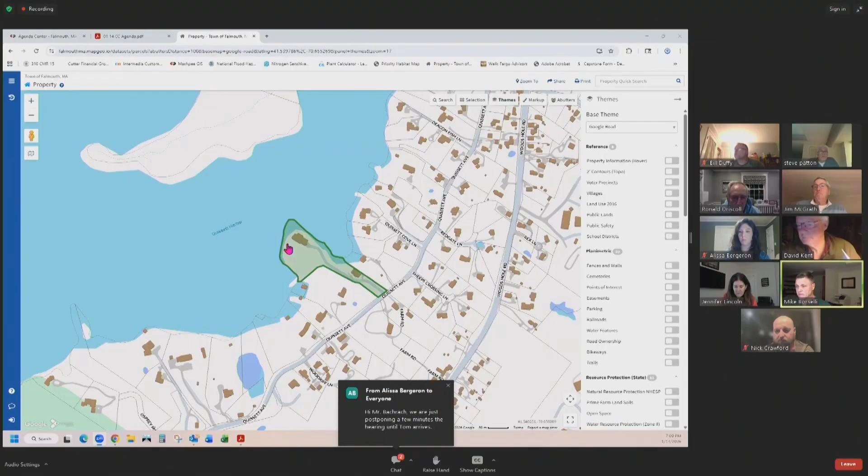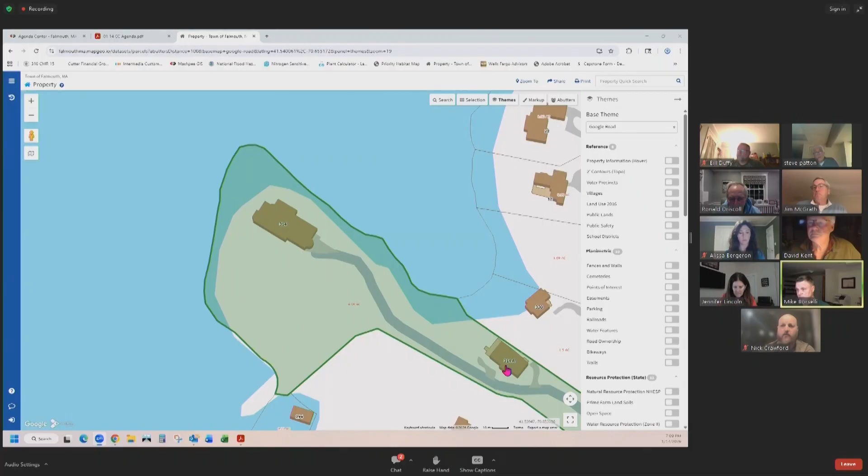I'm going to share my screen very briefly. I'm sharing with you the town GIS map, highlighted in green the property in question. It is property with frontage on Quissett Avenue and Quissett Harbor. There's a large residence currently under renovation in this location, and another carriage house further to the east. It has frontage on Quissett Avenue. It is surrounded by a coastal bank, portions of which are armored.

There's an existing dock. This commission issued an order of conditions in the recent past to reconstruct that dock. This commission also issued an order of conditions to do some significant property improvements, including a reconfiguration of the driveway, construction of a pool and a pool cabana. You've also issued a couple of RDAs for minor activities on the main house and some activities associated with the carriage house. Now we're here for permission to do some other improvements on the property.

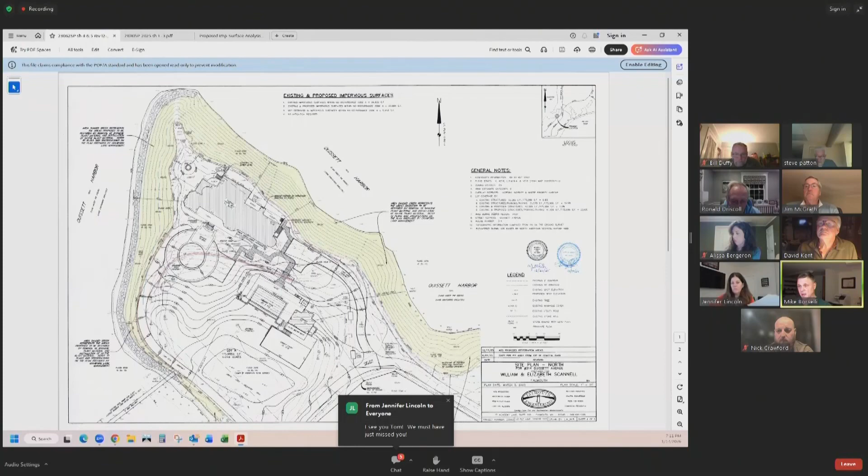The coastal bank that surrounds the entirety of the property on the Quissett Ave frontage is full of invasive plant material, and the applicant is hoping that you can approve an extensive invasive management program designed by Crawford Land Management. We provided for the file the overall master site plan, on which I show highlighted in green the areas of invasives, basically from the top of the coastal bank seaward to the toe of the bank. The methodology, details, protocols, and all details associated with the work are outlined on the technical plan prepared by Crawford Land Management. There's not really much more for me to say. The area of expertise is Nick's. I'm going to stop sharing, but I'm available for questions, and I'll turn it over to Nick.

Thanks, Mike. Good evening, everyone. Nick Crawford from Crawford Land Management. So what we have here is a fairly straightforward invasive species management project. The total area proposed for restoration is approximately 42,000 square feet. Of this, approximately 33,600 square feet is highly invaded with invasive species, including the usual suspects: honeysuckle, border privet, oriental bittersweet, porcelainberry, multiflora rose, etc. There's a few pockets of native vegetation on the coastal bank, and that's what makes up the difference between the 42,000 and the 33,600 square feet.

As far as canopy trees on site, there are a mix of native canopy trees including red maple, black oak, eastern red cedar, American holly, and black tupelo.

There's currently, well, it says 11 invasive trees on site that we would be flush cutting and treating. But I'd like to clarify it's actually 10. One of the 11 invasive trees was actually just a large privet we noticed when we went out to flag the vegetation.

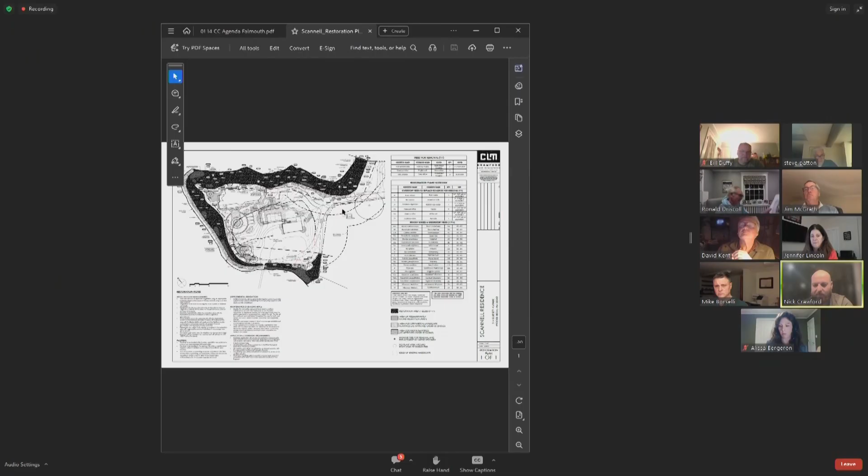Can you see anything? We can see the agenda, Nick. Okay, perfect. Let me zoom out a little bit so you can get the total extent. This is the entire site.

All the areas proposed for restoration are in gray. The areas that have a healthy or decent native plant community currently are in darker gray. When we propose to restore this, 100% of the native species would remain. So out of that 42,000 square feet, approximately 33,000 of it is proposed for invasive species management.

There are minor invasives to remove from the areas that are exhibiting native plant communities currently. Hold on, sorry, I just got a lot going on my screen.

In a nutshell, the way the work would be completed is all from the top of the coastal bank. We would use low impact footprint tracked equipment from the top of the bank to aid in bringing material up the bank after it's been cut and treated, and to get it to a brush container on site. All the work on the bank itself would be completed by hand, and all the herbicide application would be completed by licensed applicators.

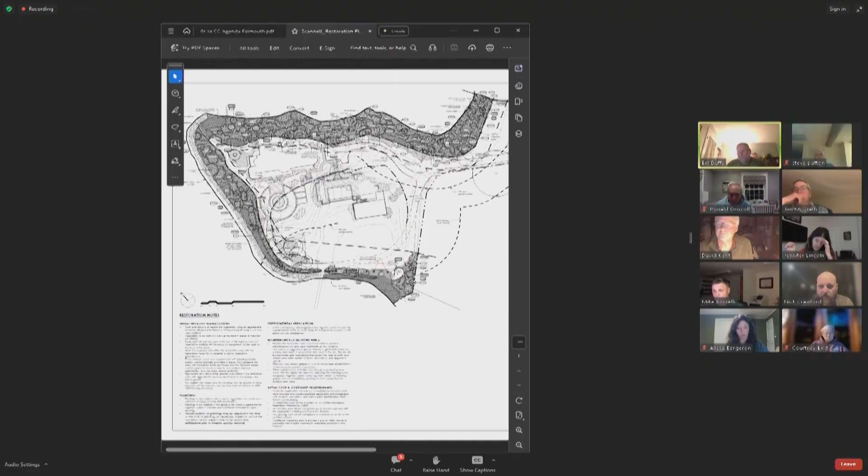Thank you, Nick, for answering our questions. I think the runoff question was about when times of rain are forecasted, because that slope is so steep, but you explained that, so I appreciate it. We were wondering how you were going to get a brush mower on that northeast bank, which is quite steep. So by hand with a weed whacker, that's fine.

You pretty much answered all of our questions and comments. Mr. Chairman, we are going to need to continue this for natural heritage comments. Just to let the board know, we have to place the hearing for your project within 21 days, and in the state's infinite wisdom, natural heritage gets 30 days to comment. So a lot of times we don't get natural heritage comments because they have another week or so to fulfill that. Unfortunately, sometimes we do need to just continue these for natural heritage comments.

Thank you. Alyssa, do you have anything to add? Not at this time, thank you. I'll open it up to commission comments and questions.

Dave: I don't really have any questions except, Nick, can you explain what a flush cut is? Yeah, it's just cutting flush with grade. So it would be approximately at grade or about an inch above grade.

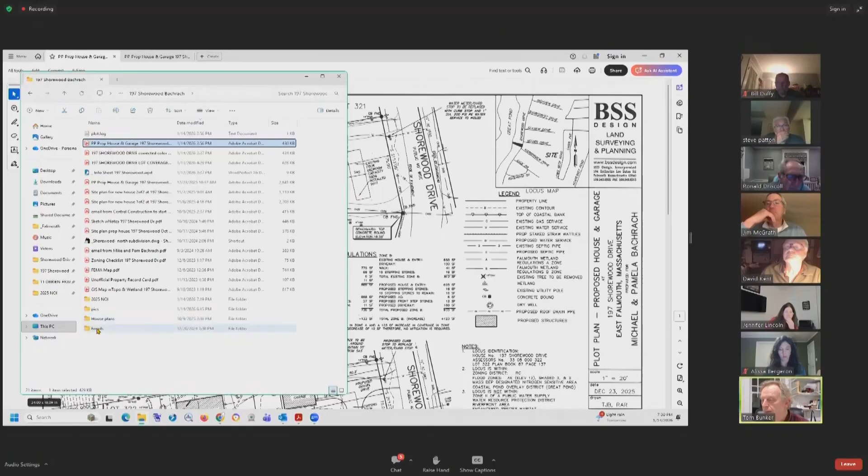There are a couple sort of errors of omission where we had done some work back here in 2015 and didn't adequately check our plan before we filed it. One being, I'll note in the upper left by where it says lot 322, we show a 12-inch pine that's no longer there, and it's noted on the staff report that it said the tree was removed in 2018, but if I may, I'll show a picture. It actually blew down, that was in March of 2018, that 12-inch pine tree. They had it cleared up by a contractor, but it clearly blew down before anything else was done to it. So it was not removed by the homeowners.

And there are a couple other things that are incorrect on the existing conditions, but I'll go through anyway. So we have this existing house, which was built about 1954, on Shorewood Drive. And you see on the locus map, this is the Shorewood Drive that's up north, not far below Route 28, right on Great Pond, not far below where the Coonamessett River comes into it. The house next door here on the south, the Bachrachs also own and live in, and that house was built not too long ago. So what they're proposing to do, well of course, involves the resource areas.

We have the Great Pond land under a salt pond, some fringe of salt marsh here, coastal bank, the flood zone comes right up just about to the top of the coastal bank, which exceeds a 4-to-1 slope, but the bank itself does not go much higher than the flood zone, which is elevation 12, I think.

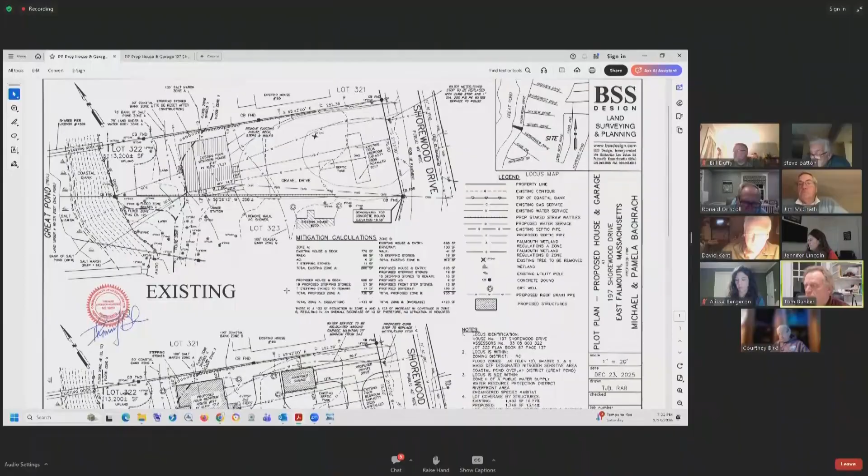In the staff report, you'll notice this proposed garage, which is outside, not in a flood zone or in a buffer zone. So I have this existing house here.

And the proposed house, as you can see, looks basically the same. It is 2 feet further landward and was squared off a little bit, where this house is 7.6 feet to the property line. By moving it back and rotating it parallel to the property line, I now have 8 feet from the house to the property line.

Where the house's closest point is 51 feet to the deck, or the steps rather, and 76 feet from the salt marsh elevation. In this case, it was 51 feet and is now 53 feet. And 76 feet from the salt marsh is now 79 feet. These are rounded off to the nearest foot, which is why one increased by 2 feet and the other by 3 feet, but it's still an increase.

I do think that 8 feet, I know you have your 10 feet requirement, but 8 feet with no native vegetation around that could be harmed, I think 8 feet is adequate for putting the house in. It's level, there's no native vegetation, and no problem getting equipment around on this side.

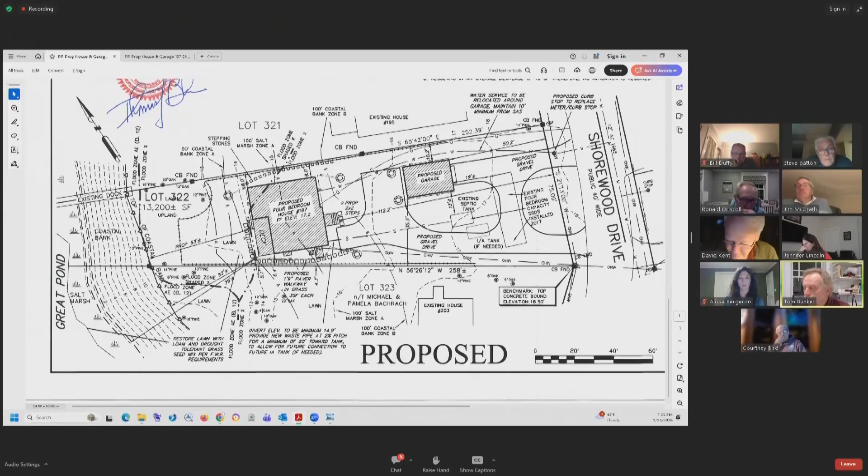Mark Delpy is the contractor, he's good and careful in that respect. On the other side, the Bachrachs own this property also, so the setback is 6 feet 4 inches, and we have a limit of work shown here. But since they own it, there'd be no easement required. They have their own permission to cross over a little bit of this property if they need to for construction.

There are downspouts all around that have no dry wells. We're proposing dry wells here.

I can point out that these stepping stones existed some years ago, but they no longer exist. I can show you a revised plan taking them out, but this is the plan of record. So they are out, and this tree obviously is not here either. On a revised plan, I'll see if there are other changes, but I've made some changes already which I can show you.

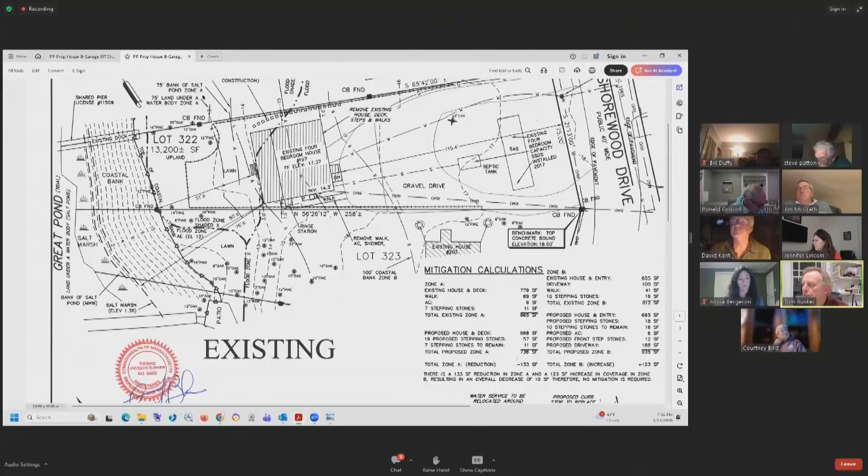There are a couple of trees up in this front yard which will be removed, so let me just quickly show this. There's some arborvitae or similar tree right up here, and the second one is 11 feet away from the house. So we show this one.

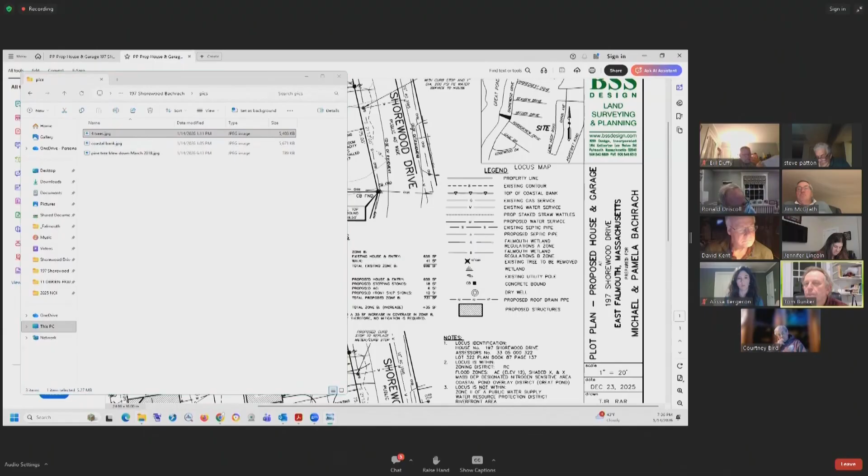The one closest to the house has been topped, probably because it was growing into the roof. But there's room to get through by taking out this one that's in poor health. This is in your jurisdiction, this one tree, as you can see it's in zone B. And we took the stepping stones out, and in the staff report they asked for a colored plan.

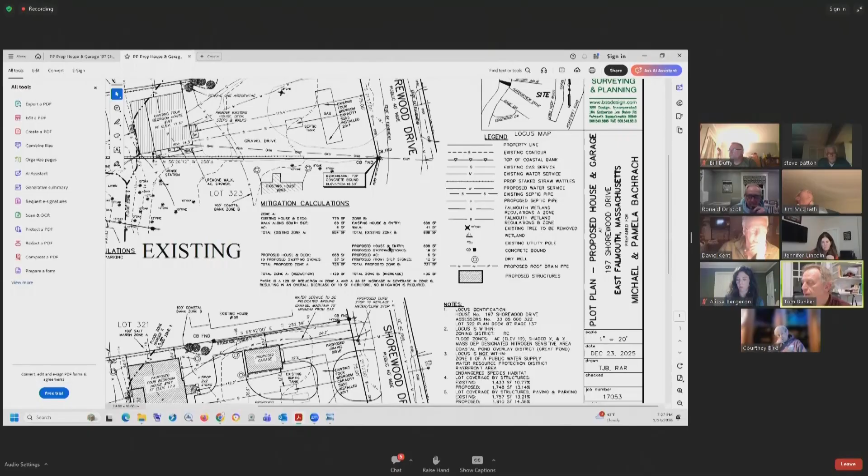I've gone over the mitigation calculations twice now, once after I removed those steps. There's still a 129 square foot reduction in zone A because the house is moving back 2 feet, and a 30 square foot increase elsewhere, but overall there's a decrease in coverage on the lot, so no mitigation is required.

So that is the proposed plan. I will stop the share and take questions.

Thanks, Tom. Jen asked: I have a couple of questions based on your presentation. You're telling me that the stepping stones on the north side, the ones you've shown on your existing condition plan, no longer exist on site? Correct. Then why are you counting them as existing coverage when you sent us your plan?

I sent you a coverage twice, or I sent you this revised plan. I am no longer counting them. This other plan, I revised this afternoon and sent it to you, after the impervious surface one I sent this morning. Yes, I sent that, then I went out to double check things, calculated them again, and on this revised plan I have the updated calculations.

Okay, that's fine. And then the tree you were talking about, that's on the northeast corner? Yep, the tree you were just talking about that you needed to take down in order to access around the house because you're not giving yourself the full 10-foot limit of work due to the property boundary?

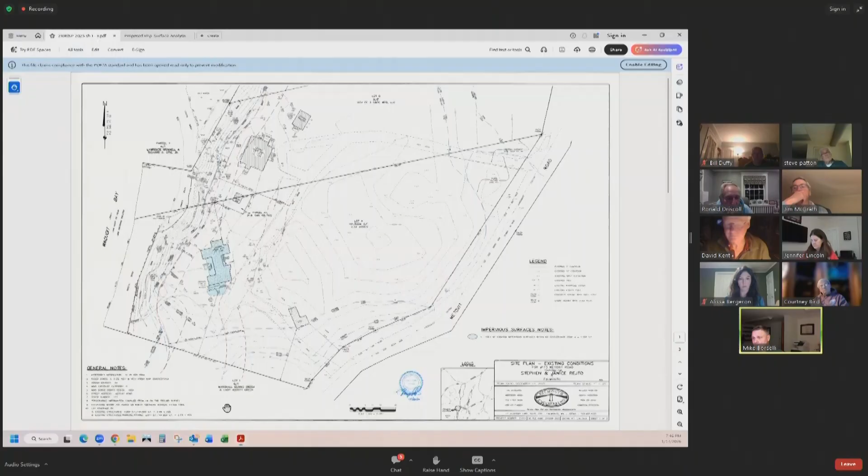The property has 2.3 acres of land. This is the existing conditions plan. I'm going to zoom into the area of interest.

The wetland resources include, of course, land under the ocean on Waquoit Bay, land containing shellfish. There's a coastal beach. There's a coastal bank.

There's a boundary of a flood hazard zone, VE 13 on the west side, and AE 15, I believe it is, on the side that we are doing our work. Actually, I misspoke. It's VE 13, and then on the upland side is not a special flood zone.

This is the existing conditions plan. The top of Coastal Bank is shown here in red. The house that exists is shown shaded in blue, along with other areas that would be considered impervious surfaces within a

no disturbance zone. In this case, there's a 50-foot no disturbance zone A from the top of the coastal bank, and then there's a 25-foot outer buffer zone B from the top of the coastal bank. So all of the impervious surfaces that exist are in the A zone.

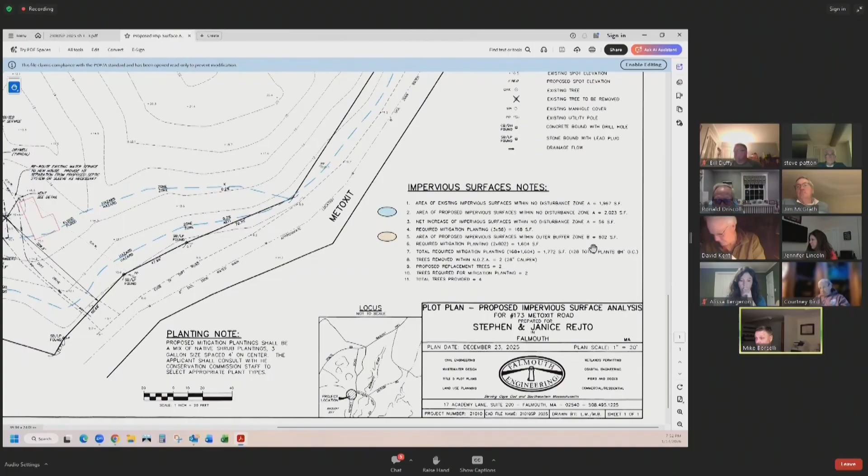Then we also calculated the difference between existing and proposed in the outer buffer zone B. And there's an increase in the B zone of 800 square feet. If you remember on the existing conditions plan, there was nothing in the B zone. The new house got bigger, and it got bigger for the most part in the B zone. So there's a 2 to 1 factor for that, 1,604. When you total all up, there's a requirement for just under 1,800 square feet.

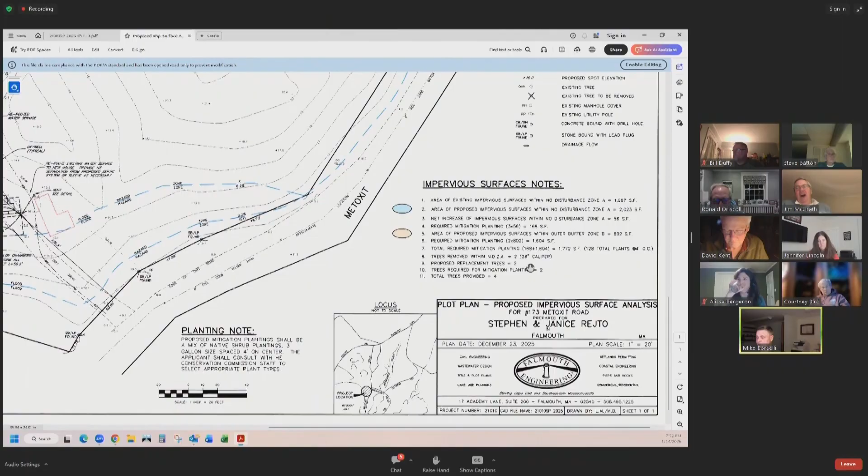And we're also providing tree replacement because of the requirement under the mitigation planting. And the mitigation planting was based on these shaded areas on both of these plans.

That sums up the proposal. What I'd like to do now is just touch base on the staff report. I reviewed the staff report, and then I reached out to Alyssa to go over the staff report.

I think all of the staff comments are relatively minor and could be easily handled. I think the most significant one is related to the way we calculated the impervious surfaces.

If you look on this plan, the blue shaded area, you'll see not only the house and the porch and the step, but there's an area of crushed stone and a rinse station. We counted that because it existed and looked like it had been there for a very long time. However, there are other plans from a previous owner that don't show this, and it's difficult to demonstrate it existed in aerial photos, so we can't conclusively prove the crushed stone or rinse station were there.

So we're going to have to modify our impervious surface calcs to not take credit for removing those things. That's going to require a modest increase in mitigation planting. We have areas in the A zone that are available, and we can work with your staff to select them to get to the requisite larger area requirement for the mitigation planting.

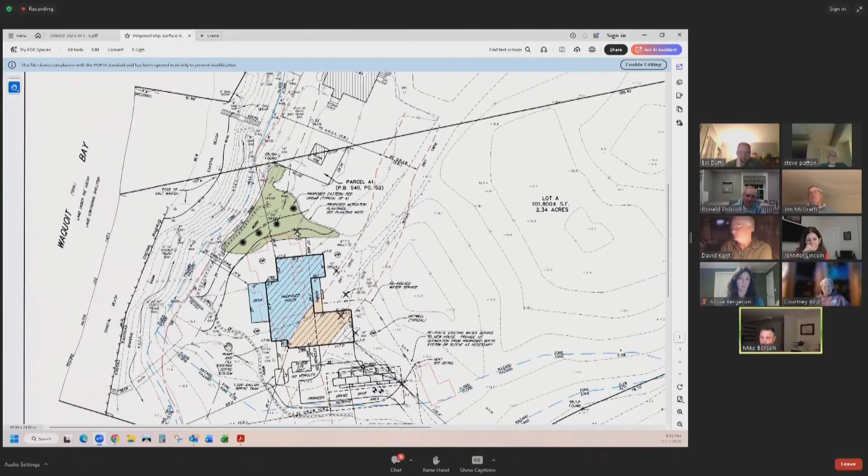All right, if it's just a couple of feet, Jen, I'm fine with it, but I'll give the rest of the commission members another shot at whether or not you're comfortable with it, or would you rather continue it for another week while he makes those calculations?

Steve? Chairman, I have confidence that the board and Mike can work out their differences on this and reach a good settlement. Thank you.

You're welcome. Courtney? Yeah, my sort of standing opinion on these things is the changes you're proposing, while approvable, are significant enough that I think we should see them.

It certainly can be a continued hearing that takes 5 minutes for a review by Mike of what the changes are. But if there's something that comes up, we've got a chance to have a whack at it, whereas if it gets closed, then it's a different thing. So I would opt to continue it for a week. I don't think it's gonna cause the homeowner any great distress.

Not to interrupt, but it won't be a week, we can't do that fast enough. You have a 1 week submittal requirement, so I can't submit something to you in a timely manner to have a hearing next week, and you're not meeting on the 28th. So if you continue this, we're continuing it to February 4th. I thought these were manageable in the interest of time, but if we have to continue it, it's got to be to the 4th, because I have to submit no later than the 28th for the 4th. And as it is, we're under the gun with other projects.

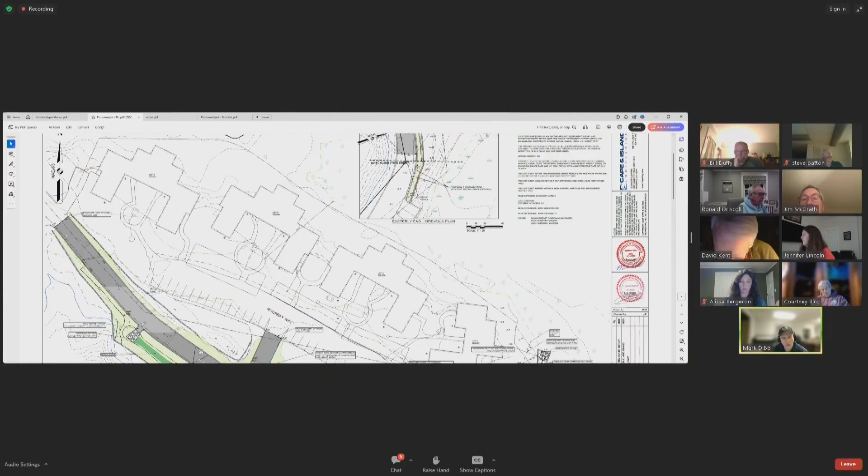The work does include this gray area. There's no expansion of pavement, it's just in the same footprint. We're proposing just a grass shoulder along this side from the entrance to Riverbay over to there, an extra detail of about another 50 feet of that grass. It'll basically be a walkway so people can walk along there to get from their condos to the pool and clubhouse, just off the page here.

We did receive a staff comment regarding this outlet structure. In order to get to the right elevation, we're going slightly into some natural vegetation. I did propose a sketch today to respond to that comment. We'd be willing to, with the orange outline here showing what would be some natural area that gets disturbed, provide restoration in excess of that.

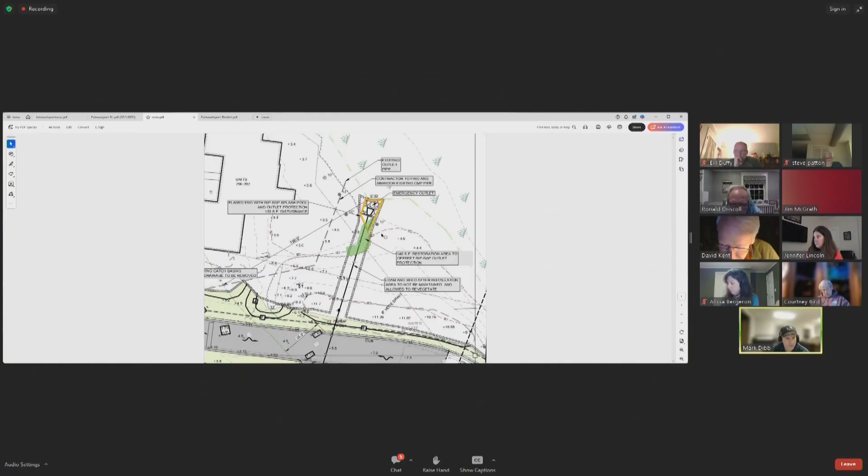There is some grassed area, so the green would be to restore an equivalent amount of area to have that outlet. Again, that's an overflow outlet—hopefully we'll never see water coming out of that basin. That's designed for more than a 100-year storm event. We'd be happy to make a quick plan revision to include that.

So with that, I think that is my presentation. For now, I'll stop sharing. If I need to go back, I can answer any questions. Thank you.

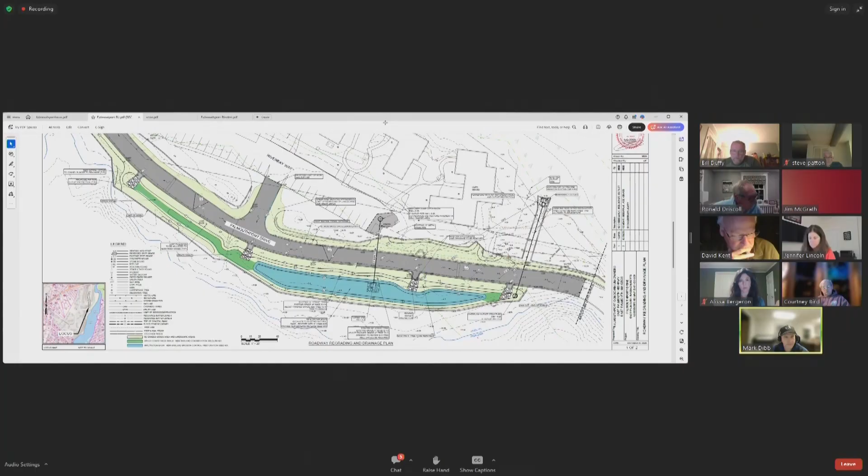Thank you, Mark. Jen? Yes, Mr. Chairman, we did go out and walk the site with Mark. I think our one concern was the proposed sidewalk they are turning into that grass area, but I don't have any additional concerns. Mark, we can work with you on the out if you need to put some plants down there, that'll be fine. Alyssa, anything to add? Not at this time. Thank you.

All right, comments. Jim? No comments, Mr. Chairman. Ron? No, all set. Thank you, Mark, good luck with it.

Courtney: I'm asking what I assume to be an obvious question—is the finished grade of the road still below the parking area you show there? Yes, I could show the screen, but the parking area is at about elevation 9, and the road comes down to 7. Okay, yes. No other questions, thank you.

Dave? I'm all set. All right, and I'm all set too. I'll make a motion to close the hearing and take it under advisement. Bird, second. Motion and second.

Any questions? I haven't asked this yet, I apologize. Jen, anything in the chat? Oh yes, and I apologize, Mr. Chairman, I should be reminding you. Nothing in the chat, thank you.

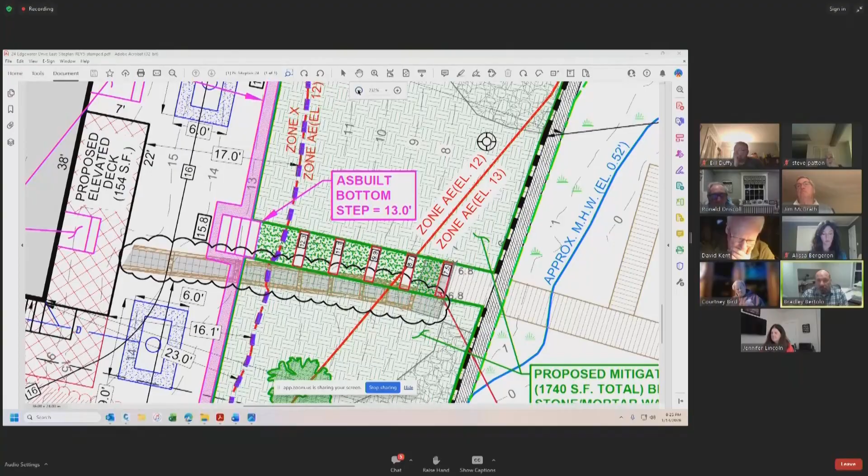We also are proposing to remove all of the riprap areas and revegetate those areas.

As you can see here, there was very minimal vegetation existing between the limit of work and the resource areas. By revegetating that entire area, from the southern property line to the northern property line, between the bulkhead and retaining wall, that'll greatly increase the amount of natural habitat and buffering between the house, the yard, and the resource areas. The retaining wall itself will also help create a more gradual slope across the yard, which follows the regulations regarding restoration of on-site degraded resource area buffer, or at least one recommendation: grading to a topography which reduces runoff and increases infiltration.

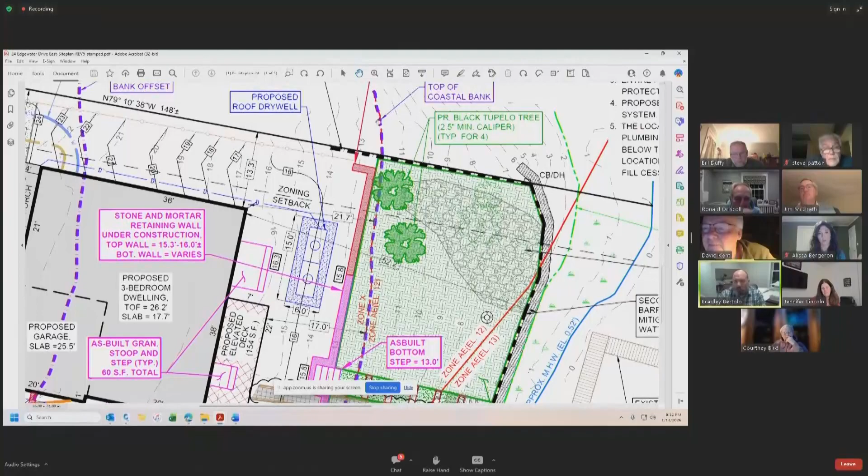I'm wondering how long that wall is. It seems like it's right on top of the coastal bank. I think you mentioned just a small part of it a minute ago, but it's a long thing along the top of our coastal bank, isn't it? Where is the coastal bank there? That purple line follows the flood zone line. So we're talking about a wall all along, very close to that coastal bank. I guess I'm agreeing with Jim that that's significant, and I'm worried about that.

With Jen as well, can you tell me more when you say the permitted plans? What can you tell me more about those? What were they, and what was permitted originally? The permit plans are the plans that - let me see if I can pull it up right now. Brad, do you have those or do you want me to pull them up? I don't need a detailed description, just generally what was permitted. There we go. So what was permitted was everything on the site minus the retaining wall.

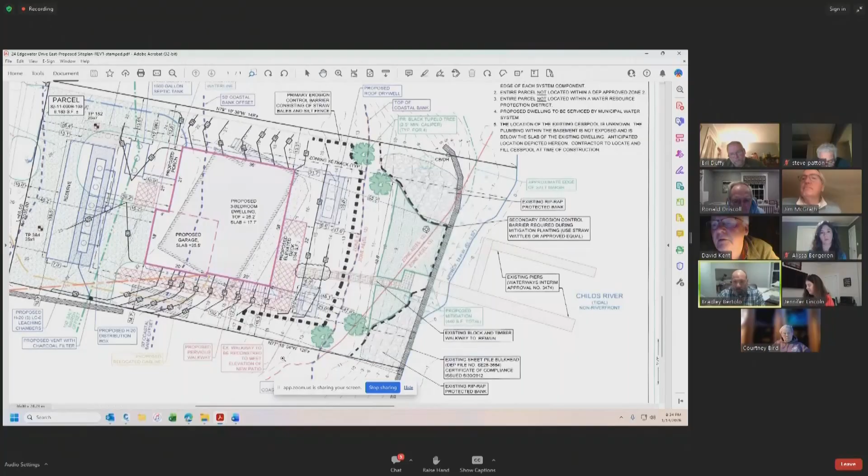Basically the wall. So what we maintained on the original plan basically followed the slope that was pre-existing. We weren't doing any work on the coastal bank, which you can see from the purple line, besides the mitigation. Everything on the work side, we were just maintaining, carrying it across parallel with the rear of the house. And were all the walkways along the side of the house down the bottom of the plan permitted? Yeah, everything on this plan was permitted - we had a walkway, relatively with steps going down the stages. Which is not a big deal, at least in my mind.

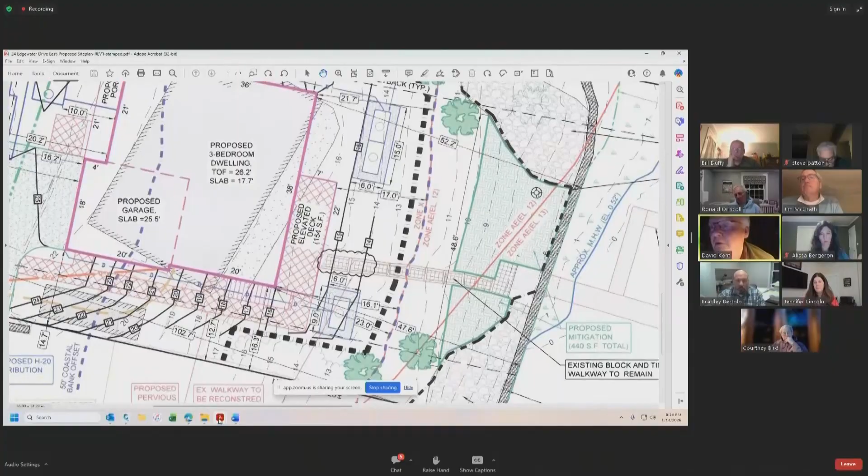Yeah, so again the big thing is that wall. That's the big issue between the plans. And again, it's on the coastal bank, follows the flood zone line. Currently the coastal bank is there for stormwater protection, and there's not much protection with it being all grassed up to the limit of work. Anything beyond that is above the flood zone elevation, not subject to your standard 100-year flood elevation. But the issue is building it right there, so close to that coastal bank. I guess I'm leaning toward Jen and Jim on this. It's a big thing, that's all I have.

Thank you, Dave. Courtney: this is more of a question for Jen - would that wall be moved back toward the house to a certain point and comply with our regulations? Sorry, I was just looking something up, Courtney. I get what they're trying to achieve with a retaining wall, there's a division point between mitigation areas. No, Courtney, there's no way it can be outside of that zone A, because the house is fairly close to that top of bank. From what I'm looking at, the house is only 21.7 feet - the corner of the house, that doesn't even include the deck.

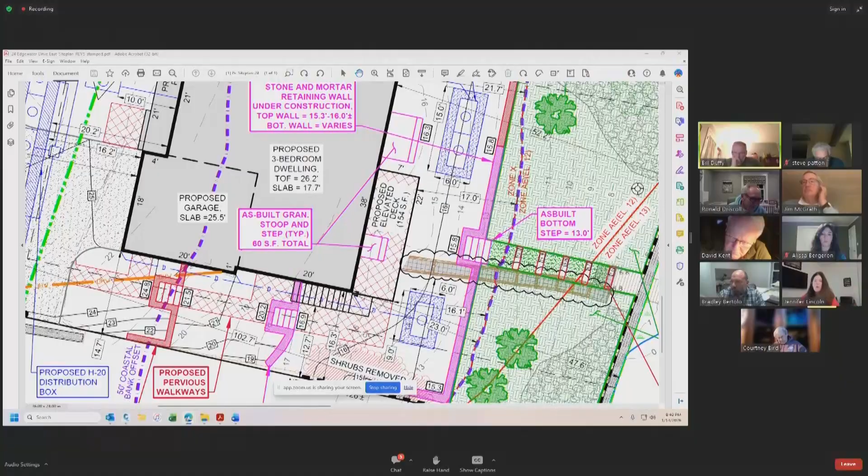I would be looking for this change under administrative approval to make things possibly a little easier on your end. I'm fine with that, Brad. So we can do this two ways: if you want to withdraw this application tonight and file an administrative approval, we can approve those two side walls - it's a pretty steep slope over there. Or we could go through with the amendment, approve those side walls and just not approve the larger walls. It's strictly up to you - procedurally six of one, half a dozen of the other. It just avoids another document recording.

Okay, that's fine. If it had to go through the amendment, then I would submit a revised plan doing that. I just think it's easier if it can be approved administratively - just go back to the original plan and show the grading to the south of the house matching what's on the plan that was presented this evening. If the commission's okay with that, I'd be requesting that. Obviously it's not what the property owner is going to want, and I hear your concerns and your consistency on projects, so I appreciate the time to let me try to win you over.

Thank you, Brad. Are you requesting to withdraw this application? I would request at this time to withdraw the amendment. Okay.

Do we have to vote on it, or can you just withdraw? Since it's being discussed like this, I think you can vote on it. We usually don't, but that's not before we had a presentation and everything. So I would just say you accept the withdrawal without prejudice.